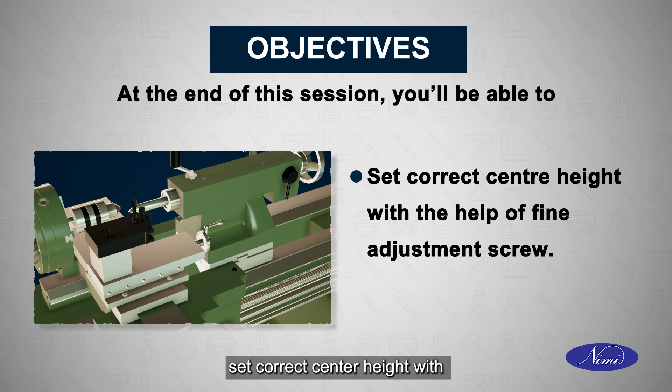Let us now look at the objectives of this session: set correct center height with the help of boat piece, set correct center height with the help of fine adjustment screw, and set correct center height using packing piece.

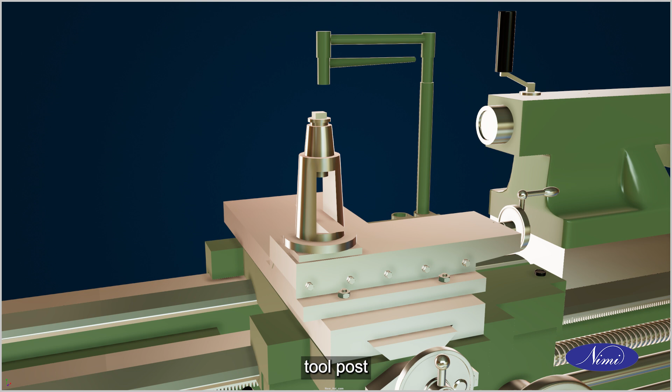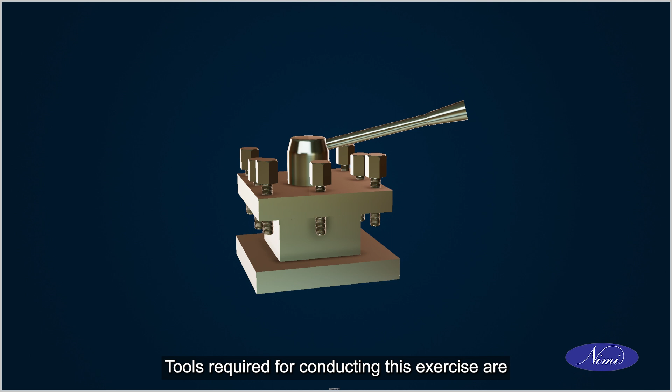Tool post is mounted on the compound rest and is used to carry cutting tools and tool holders. The different types of tool posts are single-way tool post, quick change tool post, and four-way tool post.

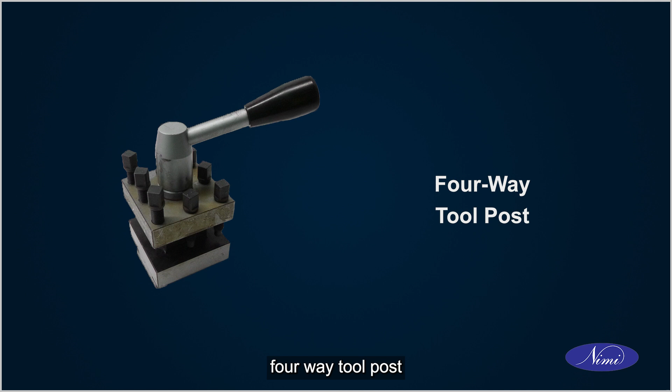Tools required for conducting this exercise are single-way tool post, quick change tool post, four-way tool post, single point cutting tool, boat piece, dial gauge, and shims.

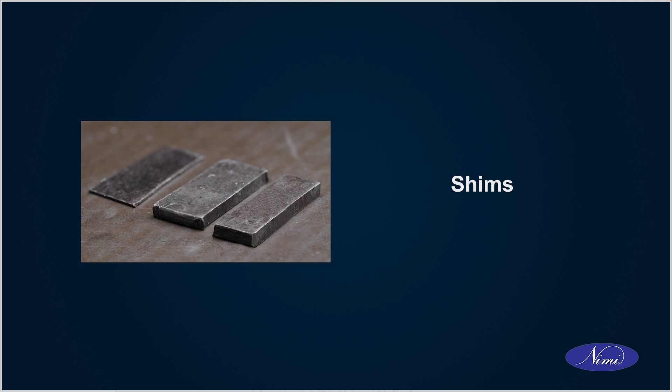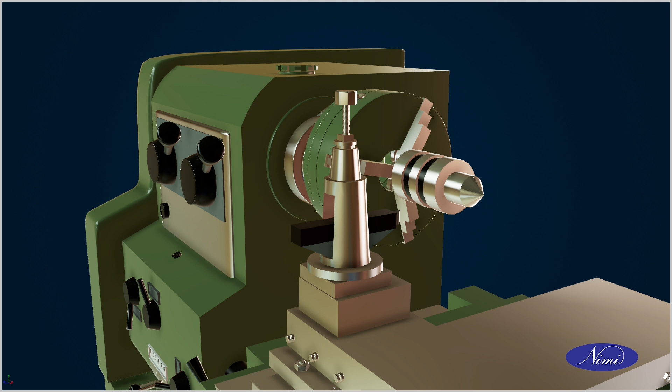Let us now learn to adjust the height of the tool on a single-way tool post. Clean the tool post seating face. The tool is positioned on the boat piece and is clamped by the screw. The center height of the tool tip can be adjusted with the help of rocker arm and the ring base.

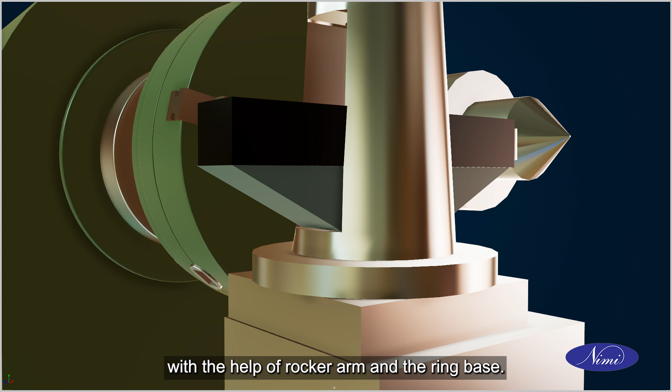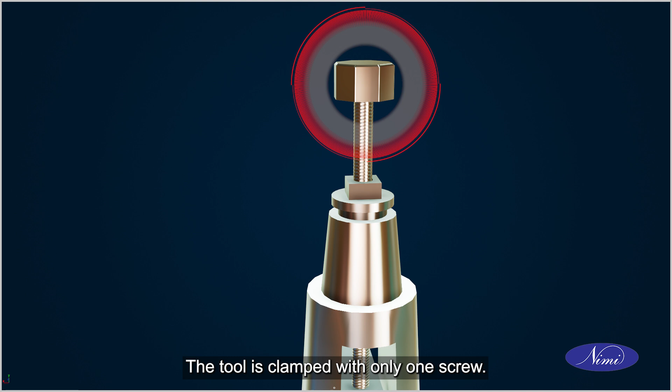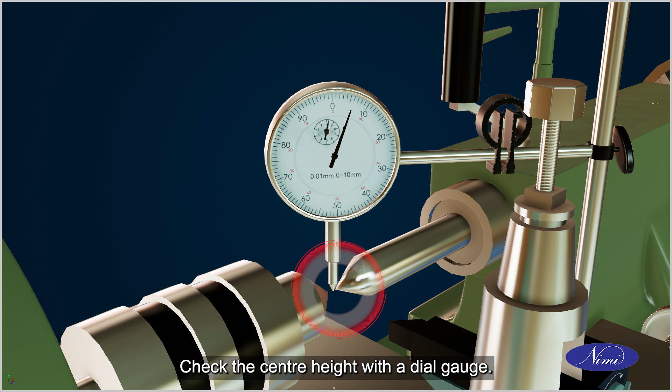Only one tool can be fixed in the tool post. The tool is clamped with only one screw. Check the center height with a dial gauge. Center height is adjusted by boat piece.

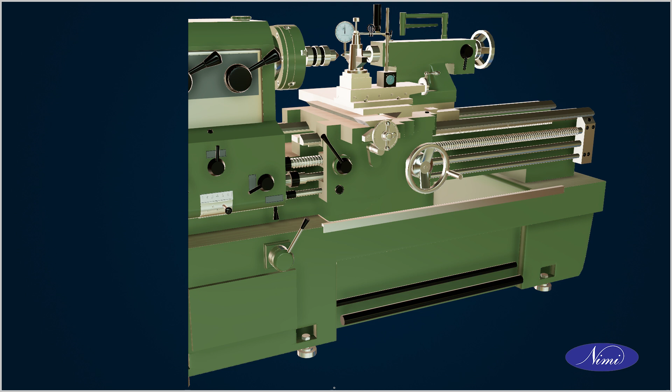Let us now learn to adjust the height of the tool on a quick change tool post. Clean the tool post and tool holder. Tool is fixed on the tool holder and brought near the center.

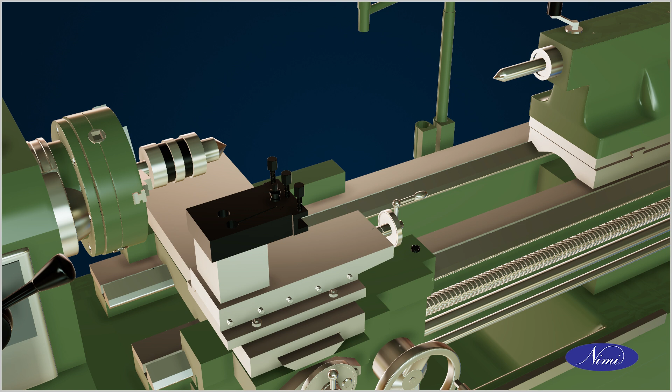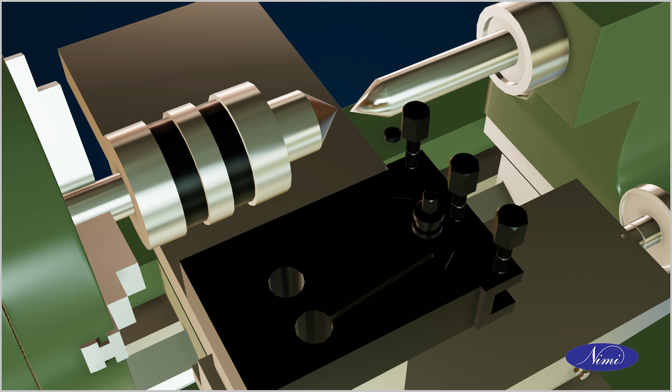Check the center height with a dial gauge. Center height is adjusted with the help of fine adjustment screw. Tool post has the best rigidity for holding the tool. Once again, check the center height with a dial gauge.

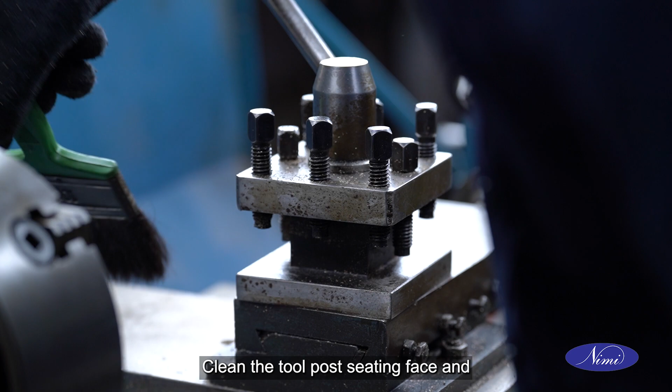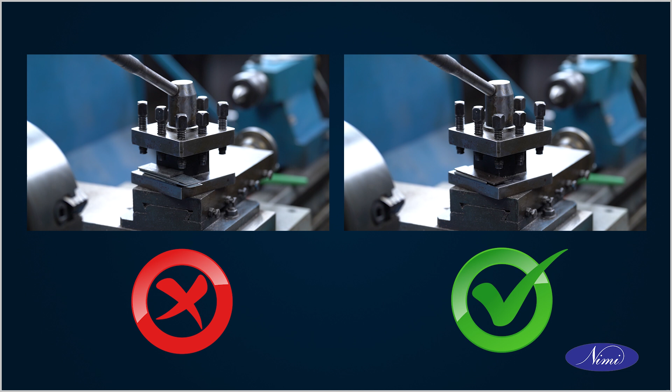Let us now learn to adjust the height of the tool on a four-way tool post. Clean the tool post seating face and place the shims on the seating face. Use minimum number of shims for height adjustment. Shims must be flushed with the edge of the seating face.

Place the tool in the tool post on the shims with the tool butting against the wall of the seating face. Tighten the tool with the center screw of the tool post. Check the center height with a dial gauge.

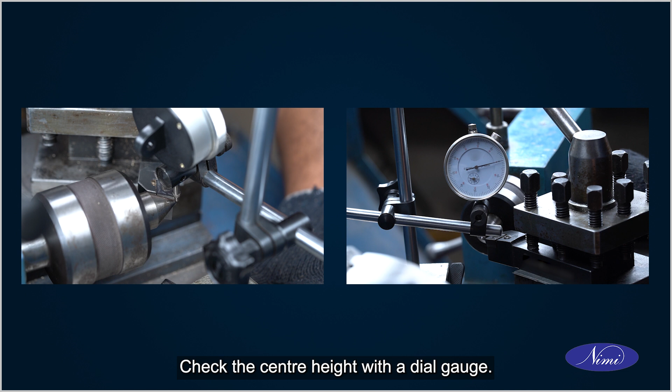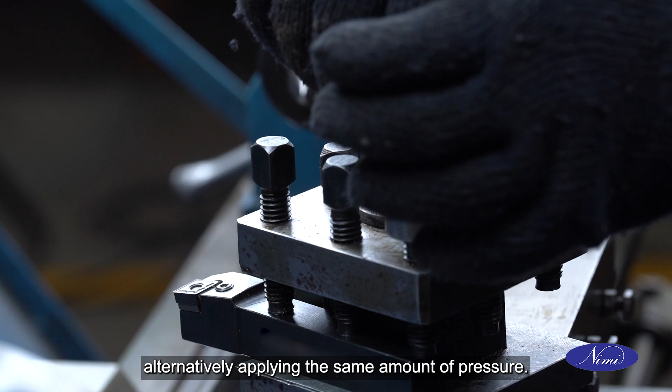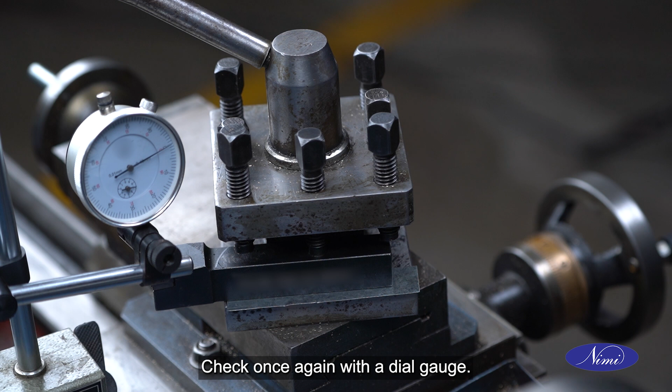Remove or add shims and check the height when the tool is tightened by the center screw. Tighten the other two tool holding screws, alternatively applying the same amount of pressure. When both the screws have a full gripping pressure, tighten the center carefully. Check once again with a dial gauge.